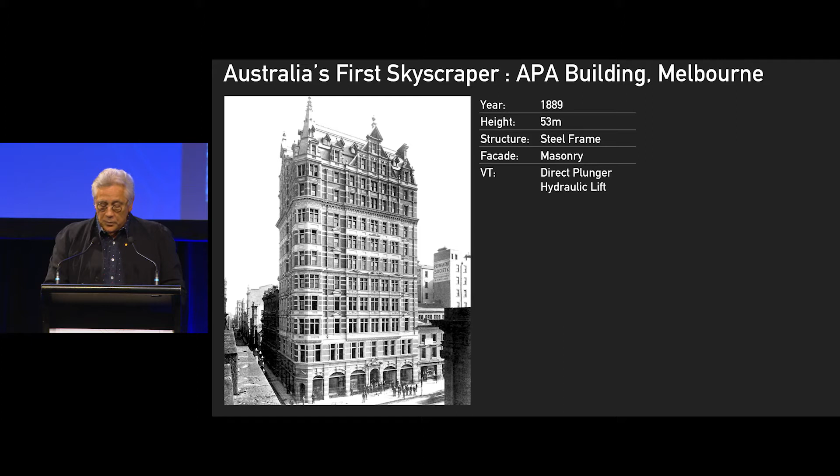We came between Chicago and New York for one year. I thought that was rather great.

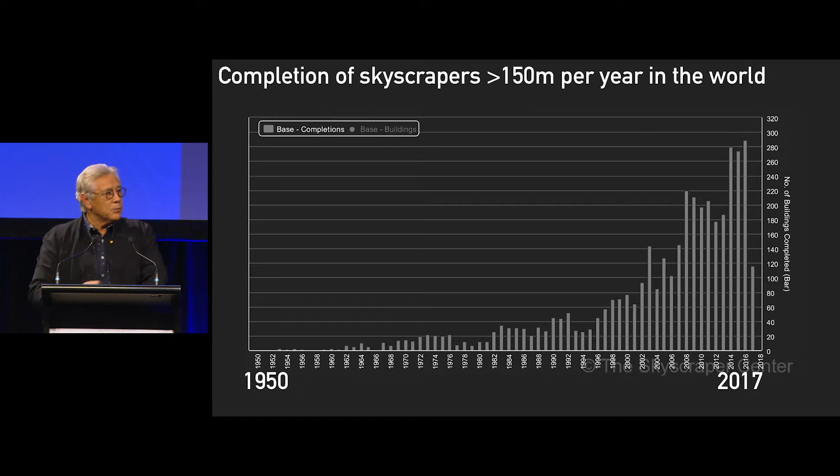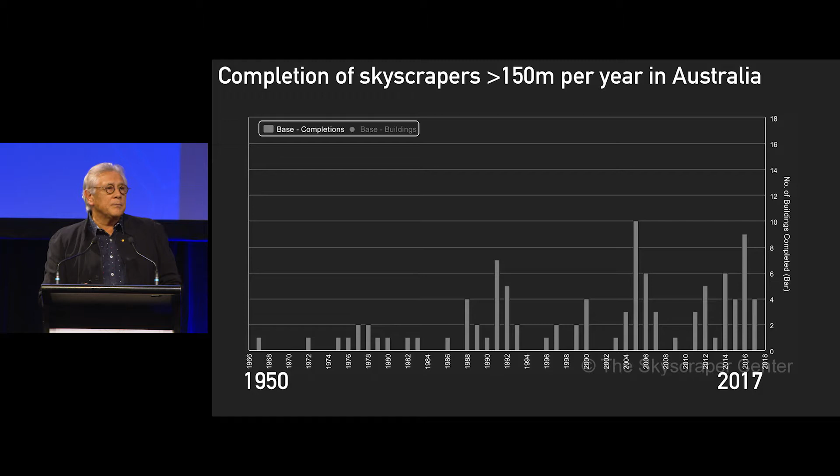But it's interesting to look at what's happened to tall buildings around the world. If you look at this little CTBUH graph, you'll see that 290 tall buildings were finished last year, over 150 metres tall, 9 of which were in Australia. So we're part of the tall building journey, we can't deny it. Australia, 9 buildings, so we're really part of it.

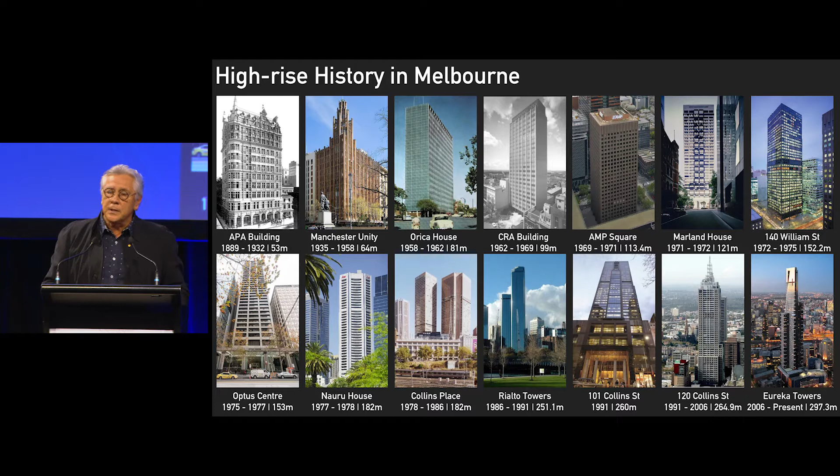I also thought I'd show a snapshot of the evolution of tall buildings. In Melbourne, it was 70 years since the APA building that we had our first curtain wall. Today Eureka still stands as the tallest floor plate in Australia and certainly the tallest building in Melbourne.

And in Sydney, the building that Elizabeth mentioned, which in 1912 was 50 metres tall, and today the Crown Hotel at Barangaroo, in a couple of years, will be 271 metres tall.

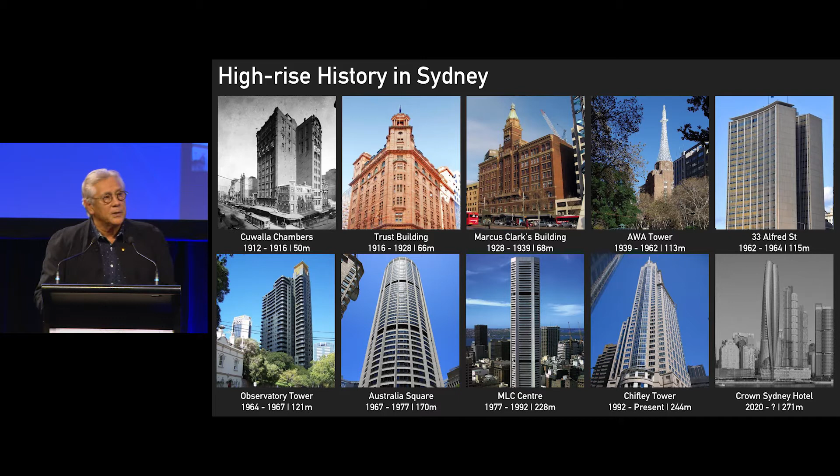So tall buildings are something we have to deal with. They are coming, they are here, they need to be thought about, and so pieces of work like the Central Sydney planning strategy are very important. Pathways for inserting buildings into our built fabric, regarding shadow planes and respect for where they're being put, are very critical.

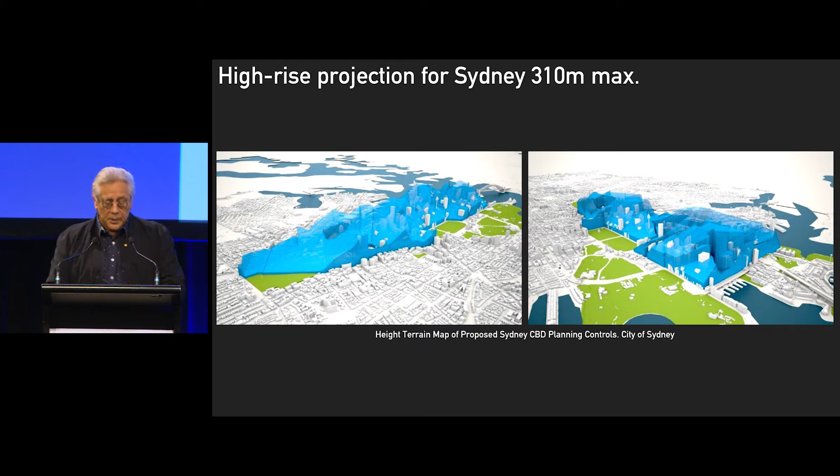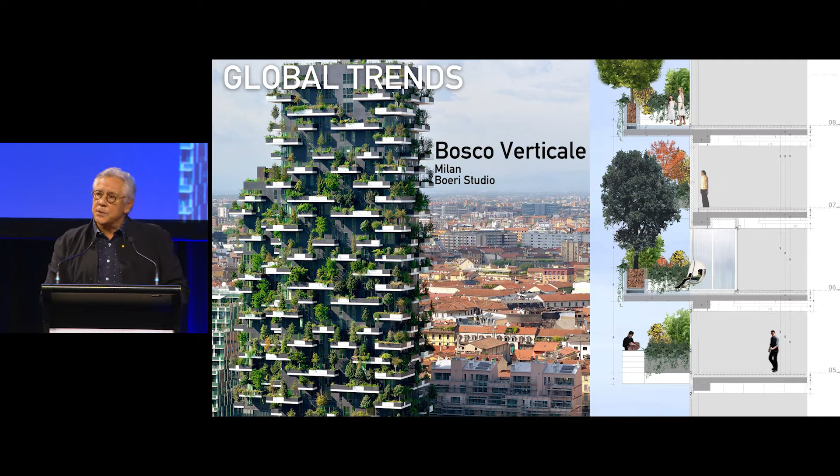Globally, the last 10 years has been really interesting, and Bosco Verticale, a fantastic building in Milano which I saw a year or so ago, won CTBUH Best Building a couple of years ago. The idea of greening the building, but it's not just planting, it's trees. This humid microclimate has really enabled the building to be shaded, to create oxygen, and take the park at the front of the building up the building, making an incredible green sculptural statement in Milano. Very unusual and quite wonderful.

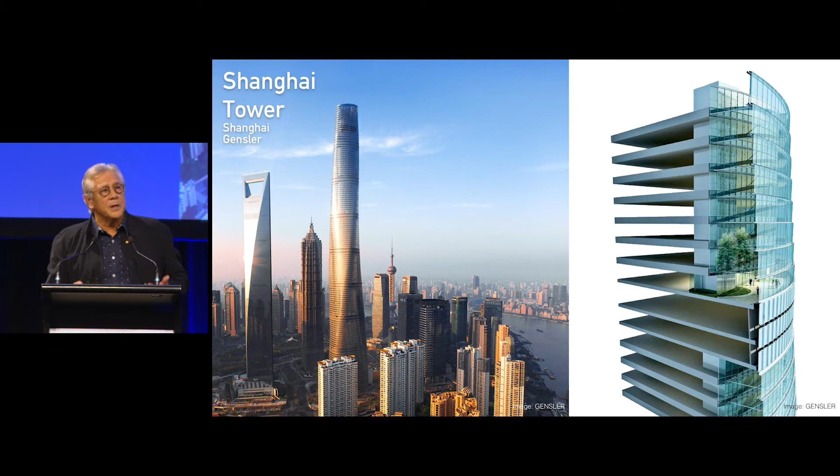And in a different way, the Shanghai Tower, which won last year's CTBUH award, has a double skin. It's LEED Platinum, double skin, and that creates breakout spaces for the building. So it protects the building thermally, but provides occupants with wonderful atria and gardens for use.

And parametrics these days simplify the whole potential for creating the shapes of nature and sculptural buildings. So there's a lot at our hands in making buildings interesting, and certainly the crafting of the inside of the buildings with agile workplace and new ways of working. The idea that carving out the inside so that a community of co-workers can see each other, be part of a sculptural interior, meet and greet on the stairways that become social connectors in the building, is very interesting.

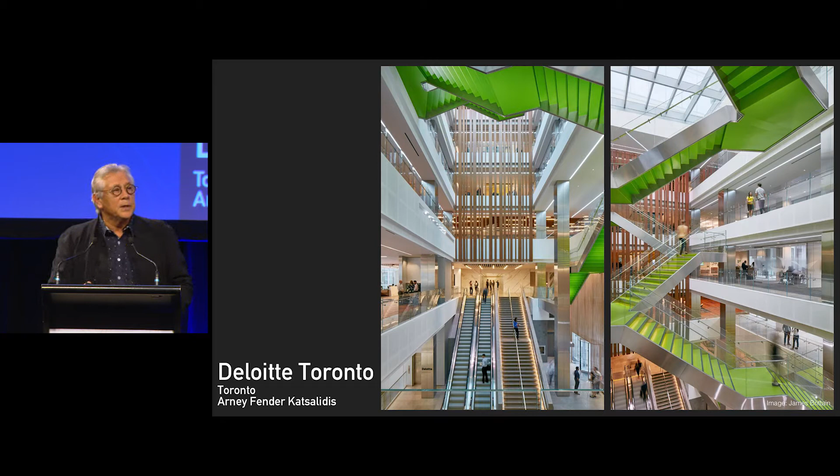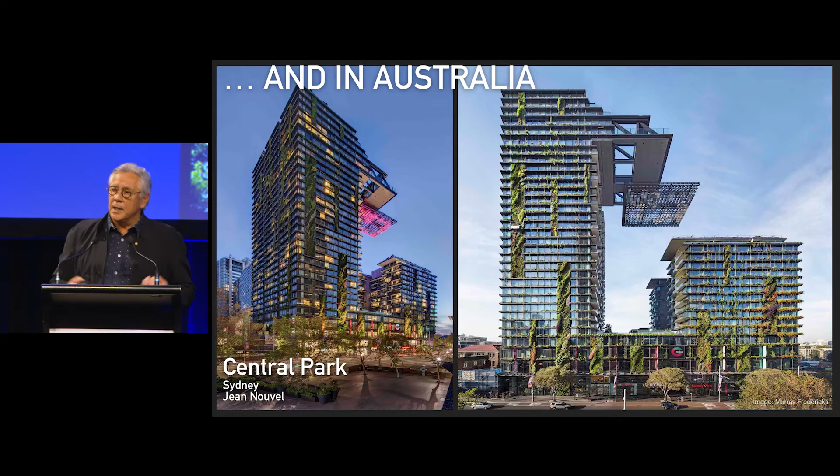And so in Australia, we're following the same trajectory. Central Park by Jean Nouvel, which Elizabeth mentioned, what an incredible improvement to that area this building's made, and the idea of heliostats harvesting sunlight and putting that sunlight into the public spaces is quite remarkable.

In Melbourne, we're working with our great colleagues at Cox Architecture on a couple of towers which are about to start being built. Sure, the towers have got a kind of urban responsibility to be sculptural, interesting, seen from a distance, help make the character of the city, but it's how they reach the ground.

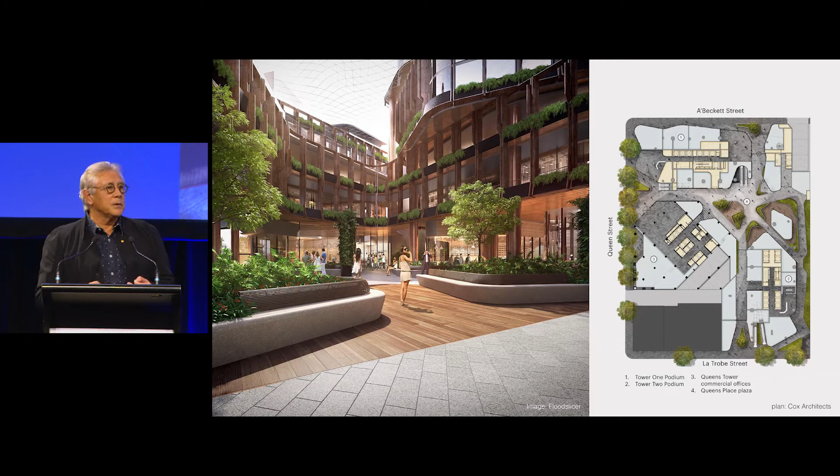This is in the precinct of the Victoria Market, which is very vibrant, people-oriented. The podium has been crafted into laneways, places to meet and greet, opportunities for socialising, and laneways cut through.

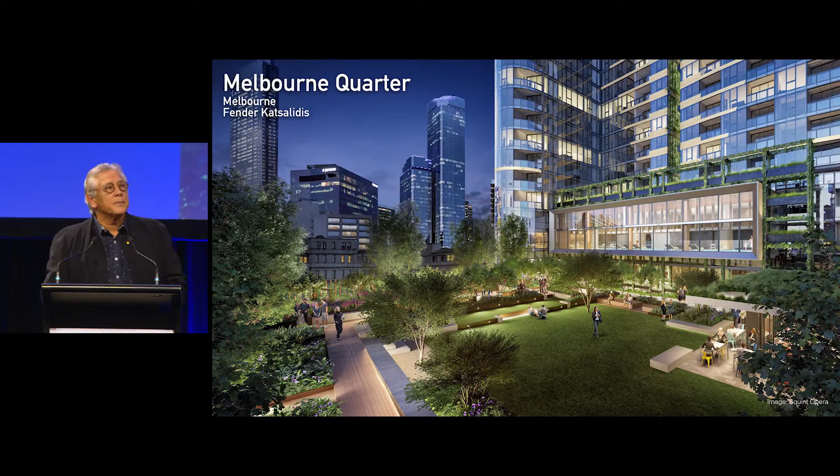Another project which deals with the urban realm is called Yarra One, not in the city, but in a suburb just near the city. It's located on the centre of a pedestrian pathway that the local council had made, but it wasn't very good. It connected the vibrant retail pageantry of Chapel Street to Yarra Street, which is on the railway. It's a great desire line from retail to railway station, but it wasn't really working, it was colourless.

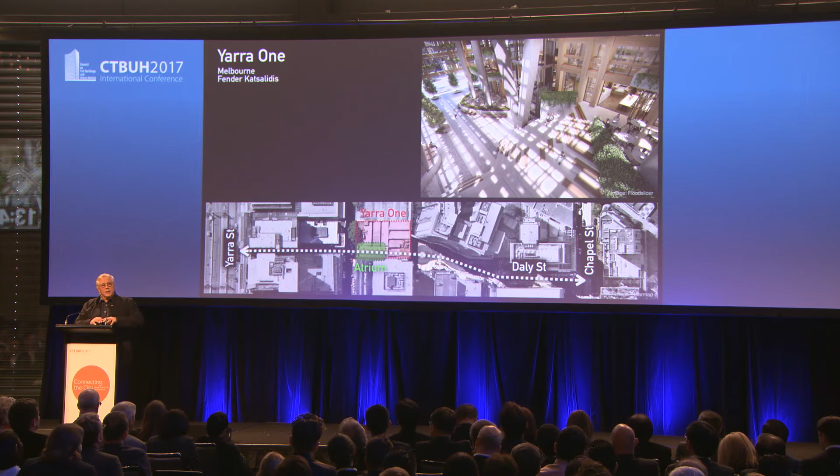The opportunity of putting a building here presented the chance of creating a destination that would enrich what is otherwise a fairly moribund pathway. So the idea of placing a huge timber veranda, planted, with stages, seating, performance, and eventually retail, restaurants and cafes, is a way of energising a pathway and hopefully energising that part of the city.

But that comes at a cost, so how was it achieved? Through the conversation with council - this is how we get great urban outcomes, through collaboration and sharing of visions. This building, which provided a softening to the street it was in, was paid for by the developer through additional height to the building, at no real detriment to anybody.

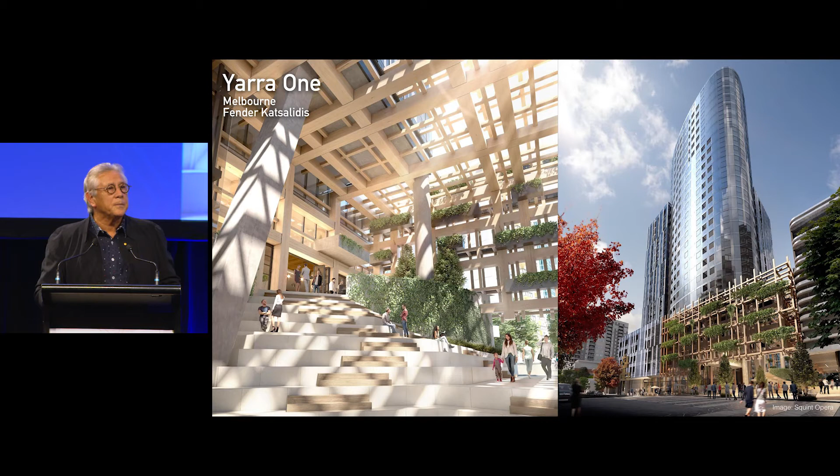And the idea that towers can be more than just extruded forms, that towers can contribute to the personality and character of a city and become part of the sculpture of a city.

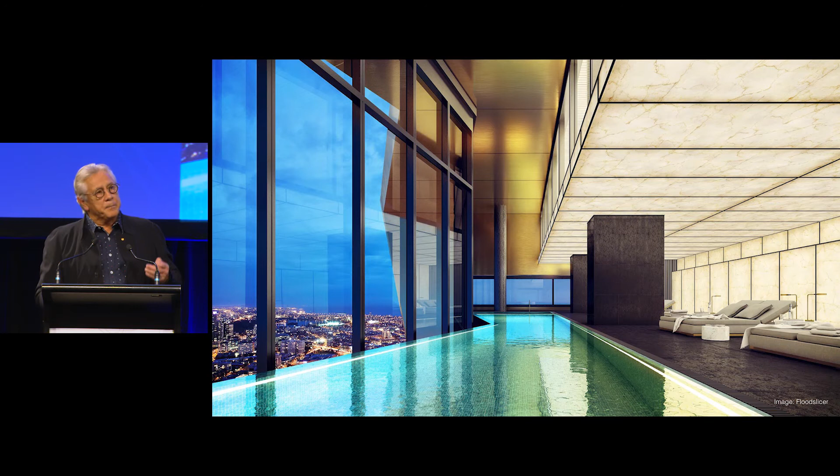So in Australia 108, expressing the facilities inside the building - swimming pools, gyms, all of those sorts of things - also provides equal opportunity for people living in the lower reaches of the building, maybe in smaller apartments, to come up, enjoy the view, and use kitchen and dining facilities if they wanted to entertain. So a bit of democracy within the building.

Sustainable futures, so very important - we all know this, it's stating the obvious. But I harken back to this incredible exhibition that John Gollings and Ivan Rijavec put together for the Venice Architectural Biennale in 2010, Now and When. This harvested the ideas of architects around Australia about future high density living, the future of high rise. It showed a huge concern and interest in what the high rise of the future will be - sustainability.

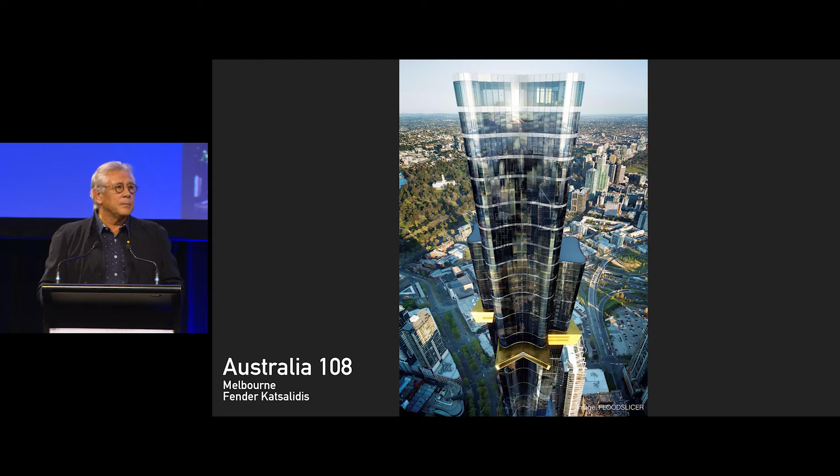Again, I go to Australia 108. This tower is 318 metres tall. It houses 1,100 dwellings. It sits on 3/4 of an acre, and in suburbia, 3/4 of an acre is about 4 homes - this is 1,100 homes. So the idea of constraining suburban sprawl and using land more efficiently is quite interesting.

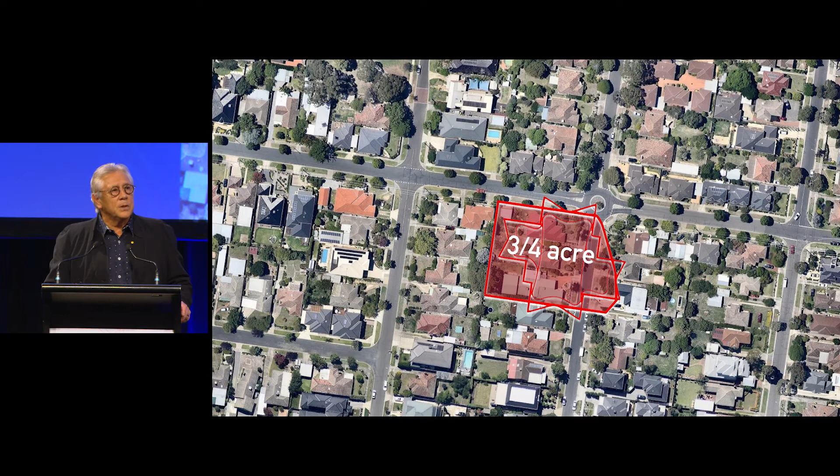1,100 homes means, in a suburban context, 220 acres, and possibly a couple of thousand cars driving for an hour or two every day to workplace or shopping or wherever. I really believe in vertical living - I do it myself, I love it. A lot of us do that, and it definitely has a place in our future.

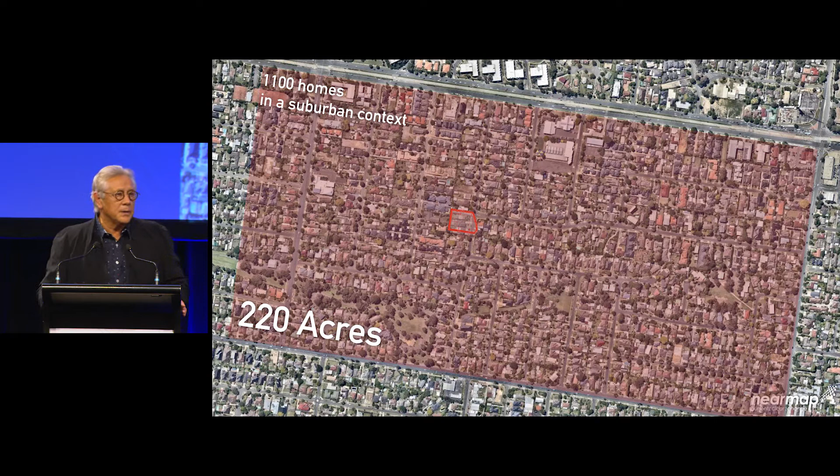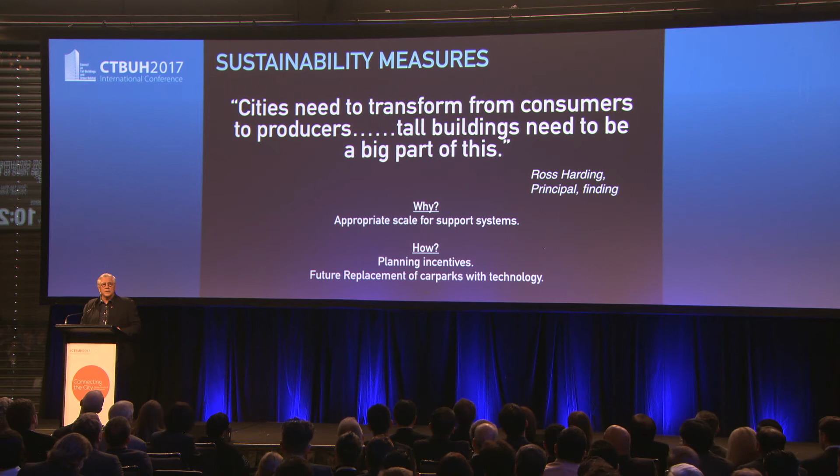Ross Harding, he's a principal of Finding Infinity. It's a very nice little statement: cities need to transform from consumers to producers, and tall buildings can be a part of this. And why? Because they have the scale and the economics that can allow that to happen.

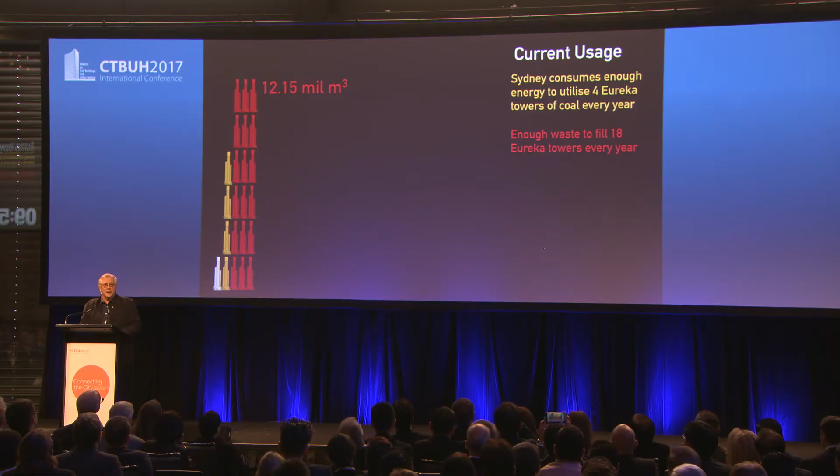So he does a little case study. His work, he took Eureka Tower, which is about 675,000 cubic metres, and calculated that, for instance, in Sydney, we currently consume enough energy to utilise 4 Eureka Towers full of coal every year. We create enough waste to fill 18 Eureka Towers every year, and we consume enough water to fill 180 Eureka Towers every year.

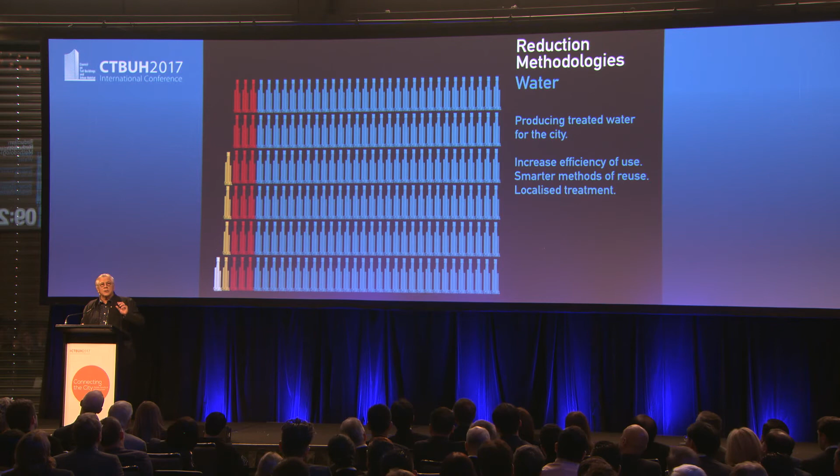So this is where towers, buildings, can actually help neutralise all of this. For instance, with water, producing the treated water in the building. And by the way, this is in an ideal world. Obviously, we can't build a city full of buildings that do this, but it demonstrates what a building can do, how collectively they can make a difference.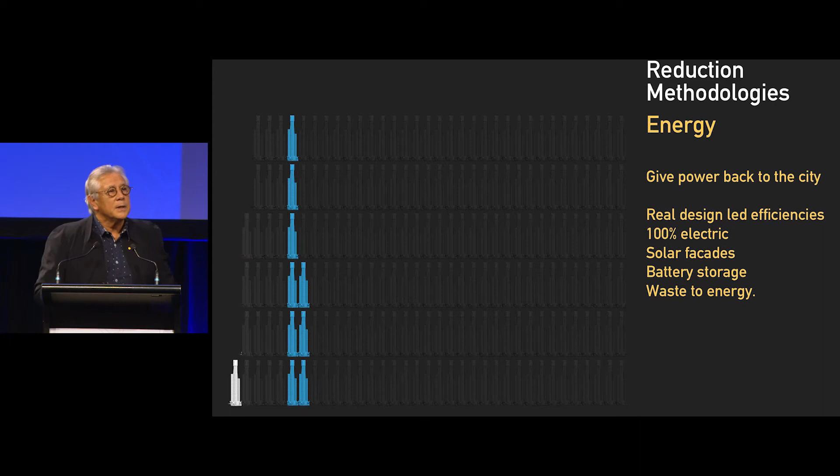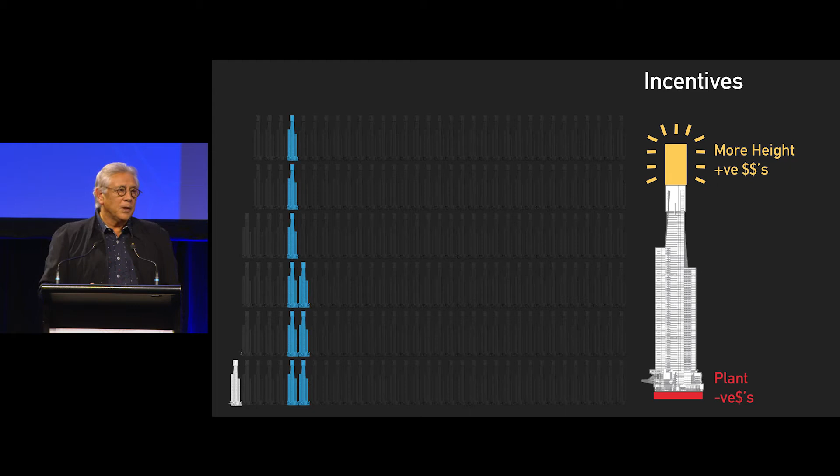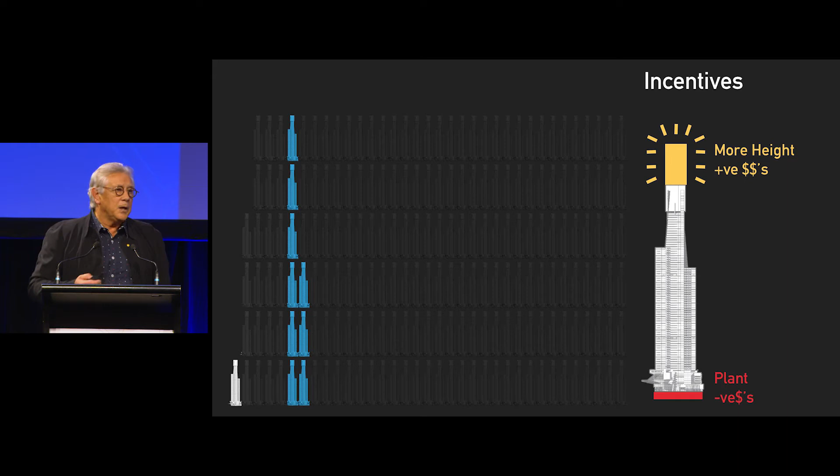So the way forward with tall buildings is obviously to be able to deal with that, but that requires investment from the developers. And how do you do that? Well, the plant and equipment required to make buildings neutral with respect to sustainability is to give them a little bit more area. And if there's no great loss, then allow more height to get more return, to be able to pay for a sustainable future.

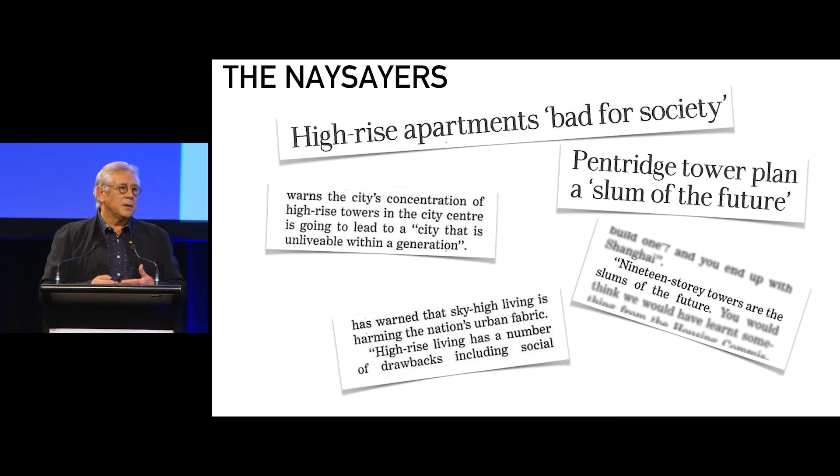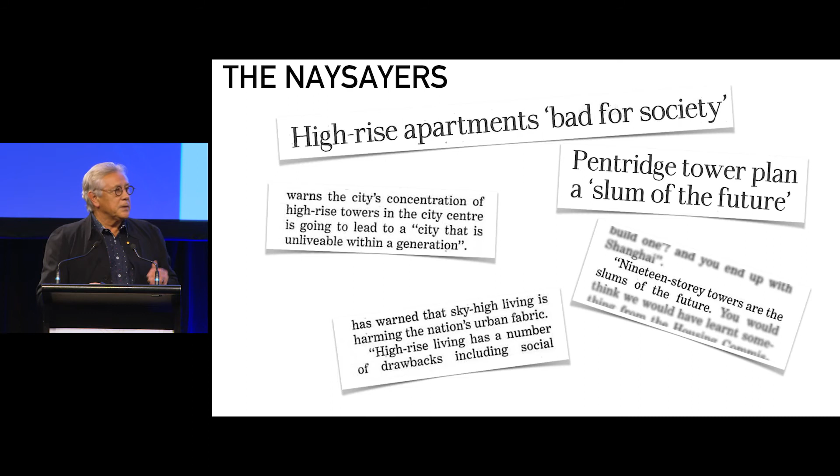And the naysayers - I don't mind criticism, I love criticism, but the criticism has to be intelligent. Saying things like high-rise living has a number of drawbacks, including social isolation and diminished public realm amenity, I think these are overreactions. I think we need to concentrate on criticism of design, not criticism of the typology. I think we need high-rise and high density. It's not the only way to create high density, but high-rise is definitely a part of it. So let's concentrate on, as Elizabeth said, great design outcomes. Let's not just condemn the typology.

And to what extent those sort of articles influence planning policy, I'm not sure - that's another discussion. But planning law is so important. So I thought I'd just go through some small case studies.

Phoenix is a little building that we did just on one of the entries to the city. It has a slenderness ratio of 15:1. It was jump formed, pretty interesting little building, and it marked an entry into the city. It was completed in 2015, but earlier this year we had planning law changes. They came in overnight, plot ratios. I don't mind plot ratios either, but let's legislate for outcomes rather than just cutting out possibilities. If this had a plot ratio of 18:1, the building would have been cut down and just become part of the wall of the building next door, and a way of marking one of the entries to the city would have been lost.

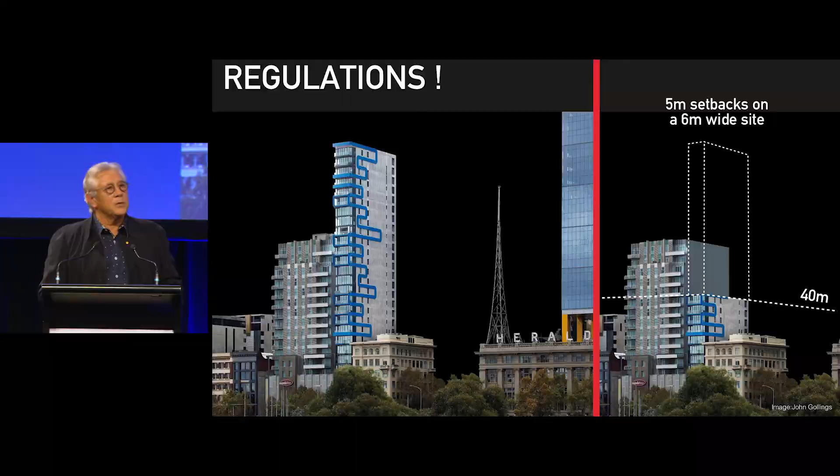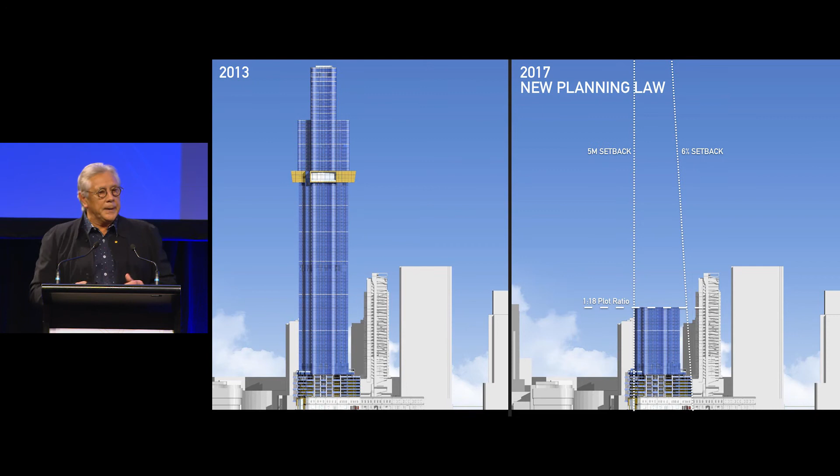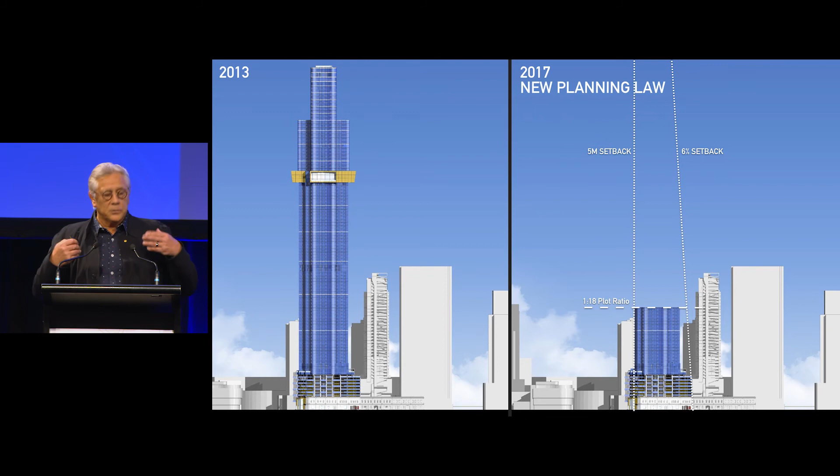At least now it's going to work as a marker with Eureka Tower to a whole precinct of the city.

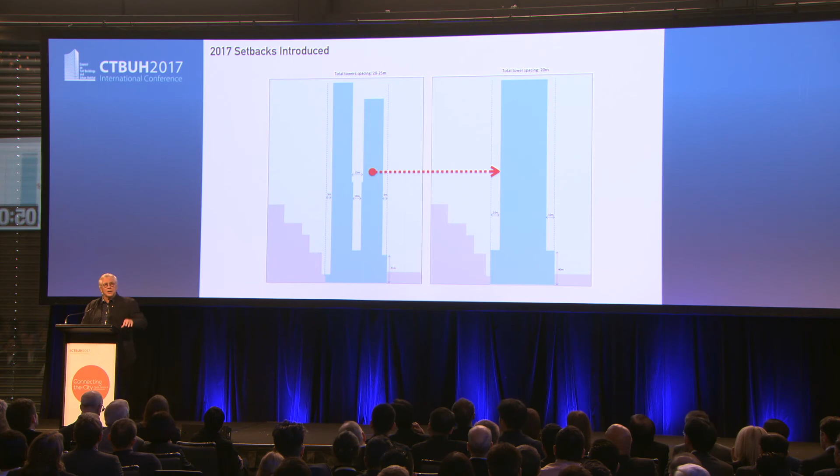Setbacks came in with the plot ratios. A couple of buildings we did, a pairing, inspired a bit by Pomodoro and his taut skins and interesting interiors. The two towers allowed light to go down through an oculus in the podium, creating a remarkable public space. But overnight, literally overnight, we read about it in the papers, new setback rules meant our two towers, which were quite admired by the authorities, would have had about 2 metres of floor space around each core, which wasn't going to work. So it became one core, one building. You can still do a very nice building, but the opportunity for a pairing of towers, a sculptural inclusion in the city, was lost, and the idea of getting light down through the podium was also lost.

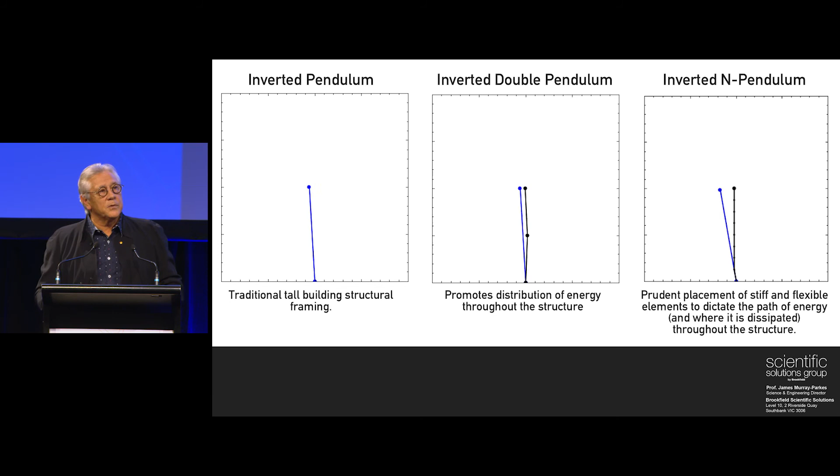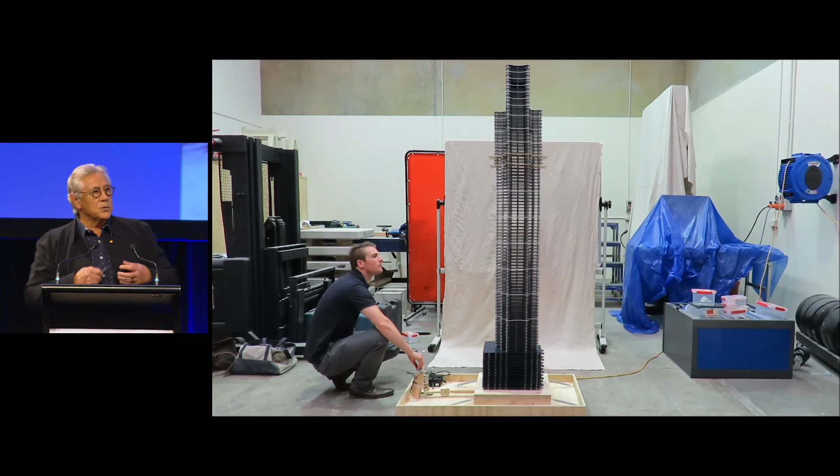Structure going forward becomes increasingly important. How do we reduce structure? The work of James Murray-Parkes, his statement 'more maths, less mass,' is quite compelling. He has an elliptical energy pathway theorem, looking at the pathways that the forces of nature work, studying grass and trees and the way they work with the wind rather than fighting it. The next diagrams show the inverted pendulum of most buildings, which are quite stiff and need dampeners to stop the sway, needing more structure as a result. His view is that if you make buildings more flexible so they work with nature, the deflection at the top is not nearly as much. His laboratory model testing looks at the impact on the joints, but it all leads to less materiality.

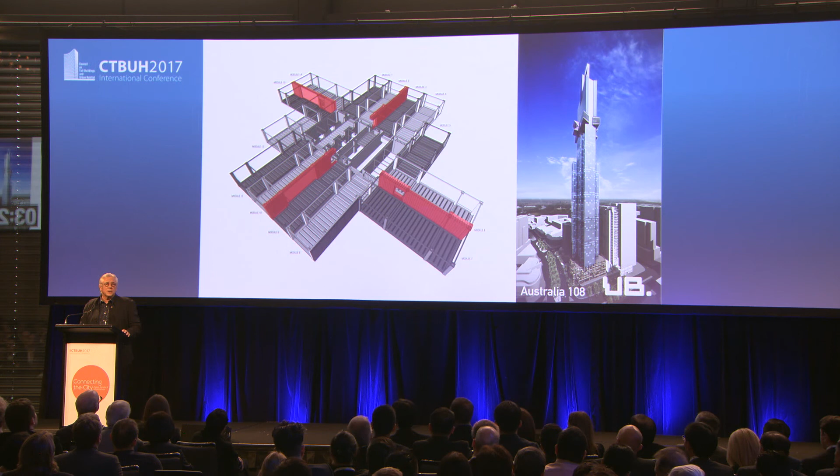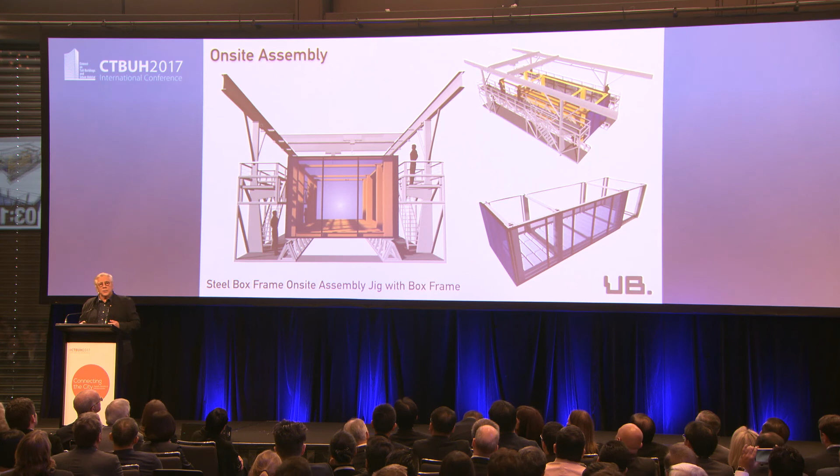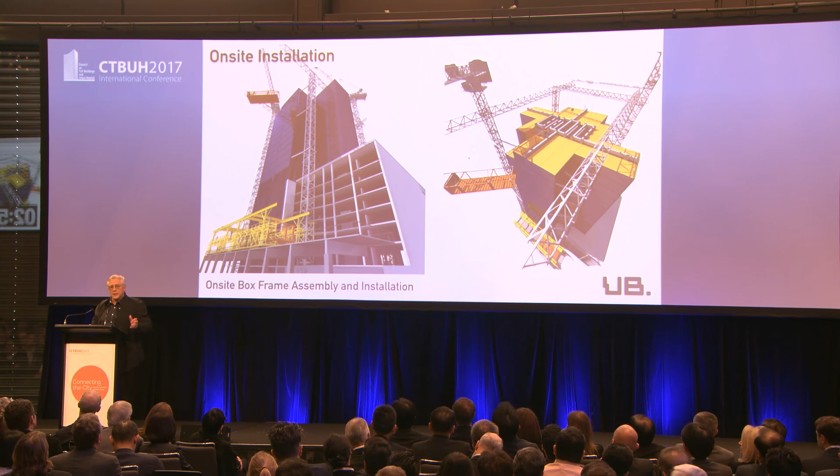Nonda Katsalidis and systems — I quote Nonda because he's been working for 10 years on systems building, and I think this is definitely the future of tall buildings: less activity on site, more activity off-site, accurate, safe, and much more sustainable. These red walls are actually shear walls, normally formed on site, but here reinforced and made in a factory out of steel, lifted into place, and concrete poured — no removal of formwork, a very simple, elegant procedure. His idea of a steel box frame for on-site assembly means the frames can be lifted into place using gantries, incorporating the glass walls — faster, more accurate, with incredible gantry systems that can be computerized and work like 3D printers so these things just stack, reducing site activity and gaining accuracy, far more quick and sustainable.

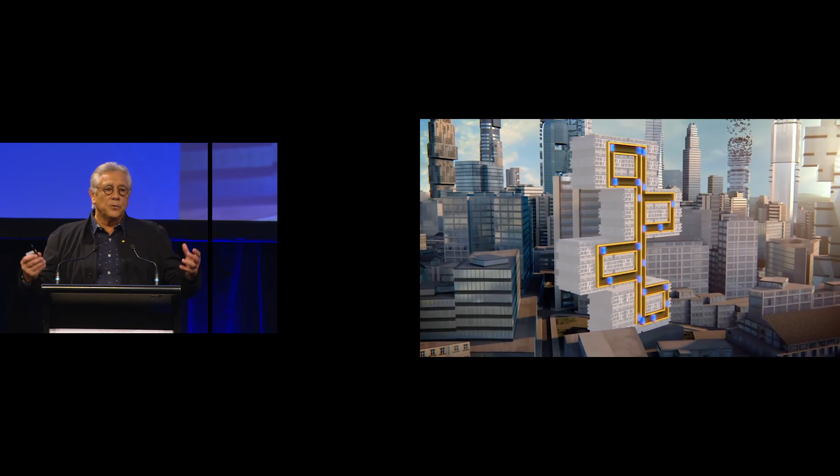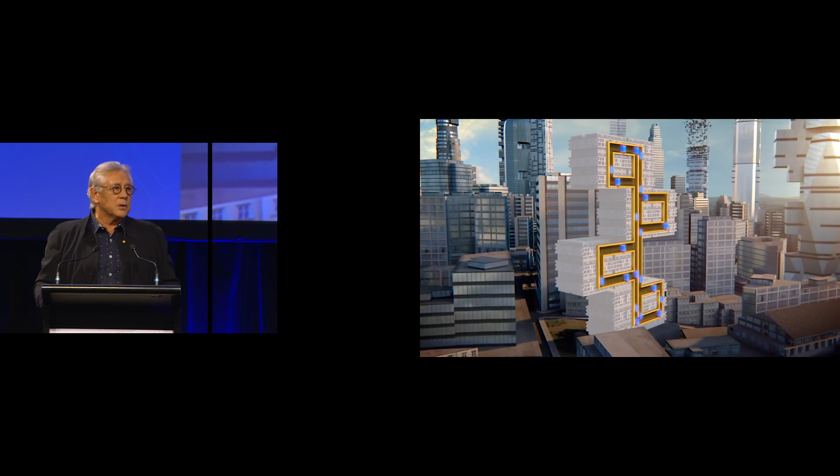Vertical transportation is incredibly important in high-rise, as we all know. The idea of magnetic levitation and multiple carriages in one shaft means all sorts of building forms can be created. Buildings can be linked so the idea of vertical communities can be extended, and with the shafts there's less requirement for concrete and less requirement for shafts overall.

So yes, we have the technology to build tall, and Mr. Les Robertson sitting here, the renowned engineer from New York, would say you can build almost to infinity if you build on the equator, where there's no lateral gravitational forces — and no doubt Les could do that. But I don't think that's the future of high-rise in Australia.

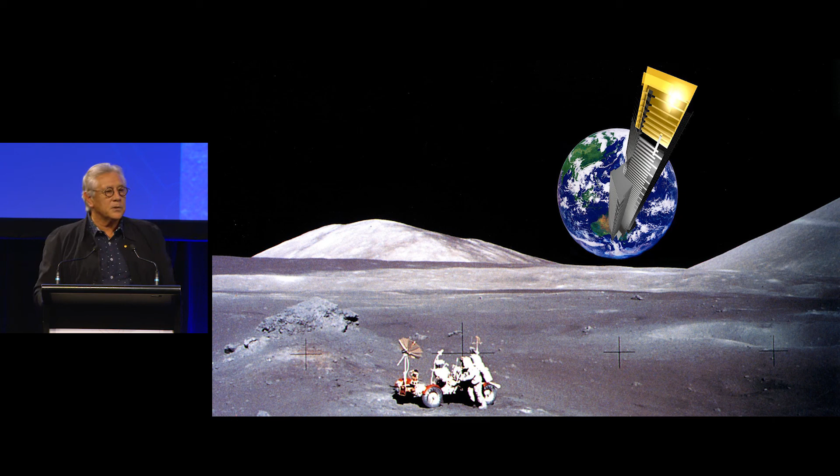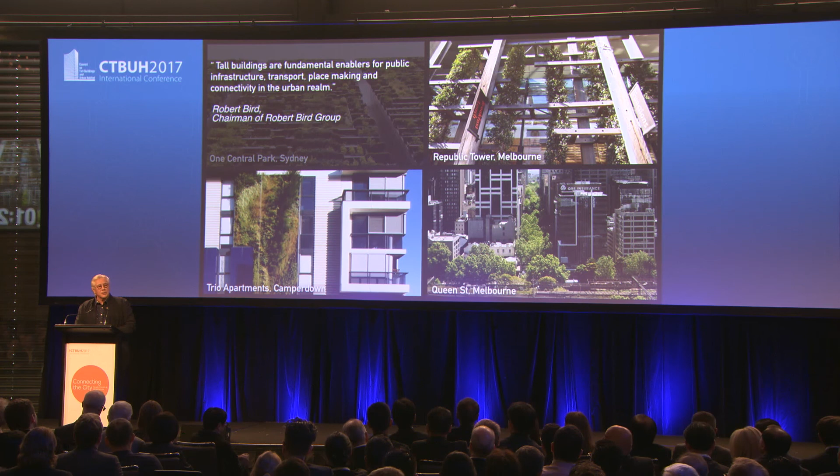I don't think there's any need to be pursuing the heights we see in other parts of the world. I think this statement by Robert Bird, a very good friend and enlightened engineer, captures it: tall buildings are fundamental enablers. And I think that's what the future of high-rise in Australia is. I'll leave you with the thought that these powerhouses can help with sustainability, they can look after themselves, they can look after the city, but really they need to exist to enrich the social and cultural opportunities of our city. That's the most critical thing about high-rise going forward. Thank you.